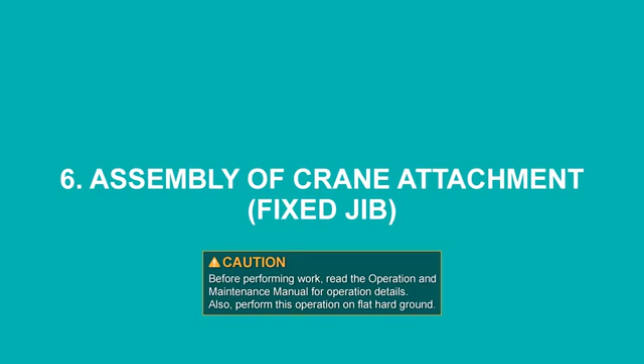Boom, jib and guy line arrangement. Prepare the boom and guy line according to the arrangement chart. Only the preferred boom arrangement is shown in the table. Please check the operation and maintenance manual for details. Do not assemble a boom which is not shown in the operation and maintenance manual.

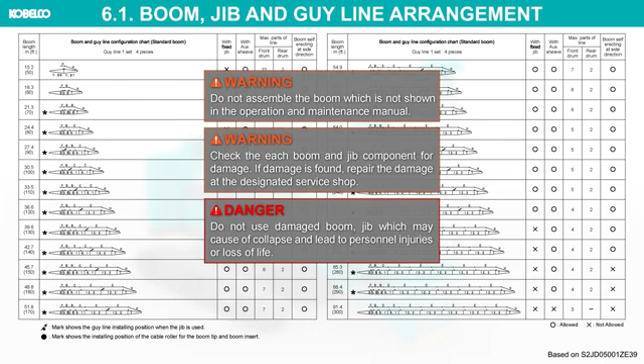Check each boom and jib component for damage. If damage is found, repair the damage at the designated service shop. Do not use a damaged boom or jib, which may cause a collapse and lead to personnel injuries or loss of life. The length of the boom to which the jib can be attached is 27.4 meters to 76.2 meters.

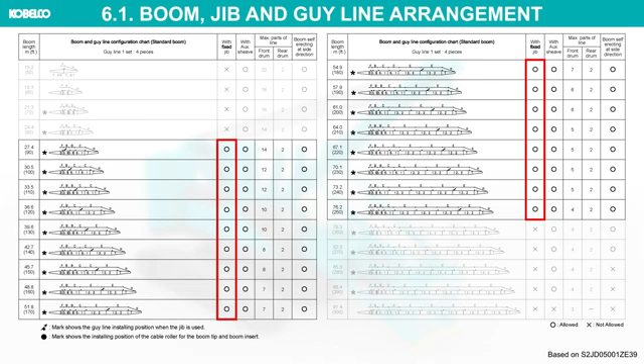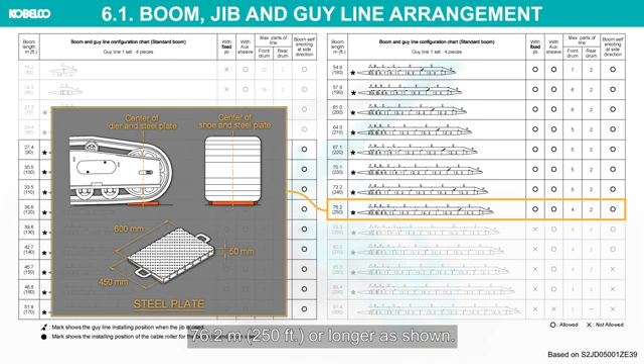As for the fixed jib specification, place the steel plates between the ends of the crawler and the ground when erecting or lowering a boom if the boom length is 76.2 meters or longer as shown. When placing the steel plate, the crane travels forward until the idler center comes to the center of the steel plate.

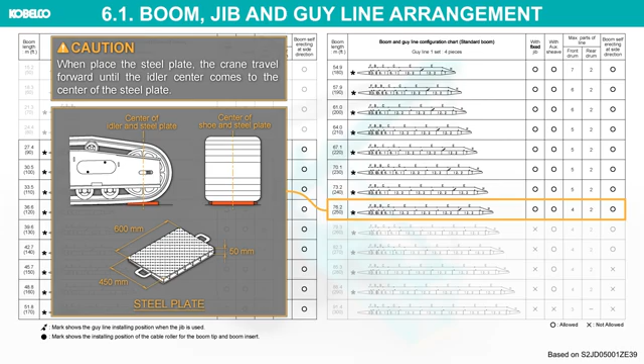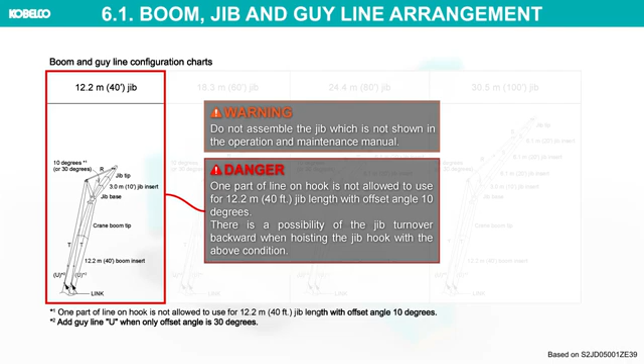Prepare the jib and guy line according to the arrangement chart. Do not assemble a jib which is not shown in the operation and maintenance manual. One part of line on hook is not allowed for 12.2 meters jib length with offset angle 10 degrees. There is a possibility of the jib turning over backward when hoisting the jib hook with the above condition.

This video describes the following attachment configurations. Boom: 30.5 meters, standard boom tip. Fixed jib: 12.2 meters, offset angle 30 degrees. Hook: 70-ton hook, 4 parts, plus ball hook, 1 part.

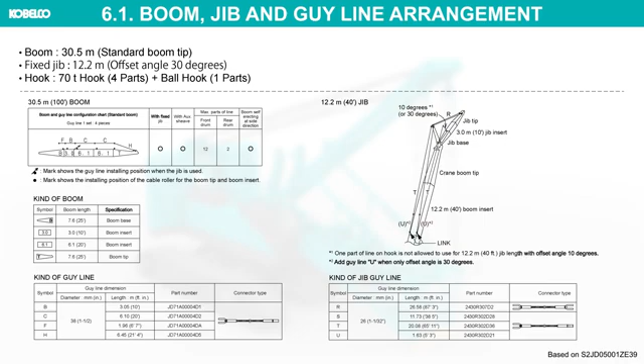Caution for cantilever. Ensure to work with the gantry set at work position, and the inching switch should be set in inching position. Do not exceed the cantilever limitation. Do not perform hoisting work or travel while the boom is supported with the cantilever.

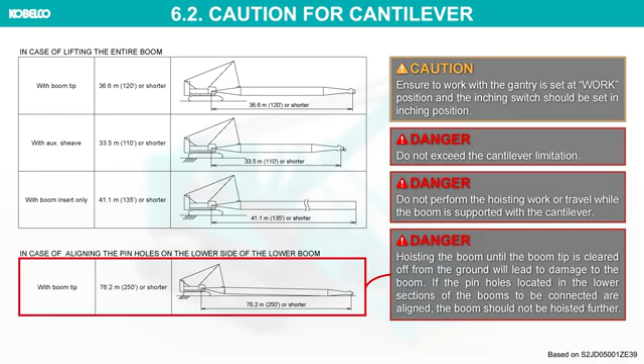Hoisting a boom until the boom tip is cleared off the ground will lead to damage to the boom. If the pinholes located in the lower sections of the boom are to be connected or aligned, the boom should not be hoisted further. Installing a boom. This assembly procedure starts with the machine under the following conditions.

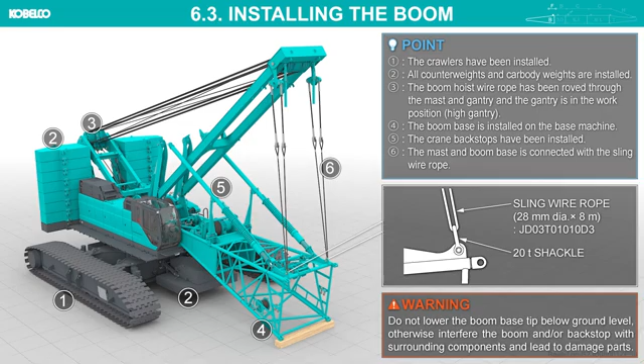Do not lower the boom base tip below ground level, otherwise the boom and/or backstop will interfere with surrounding components and lead to damaged parts. Prepare the required boom components, paying attention to the up-down face of the insert booms, and place them near the boom base section. Do not place the attachment directly on the ground. Place a wooden block and place the attachment stably on it.

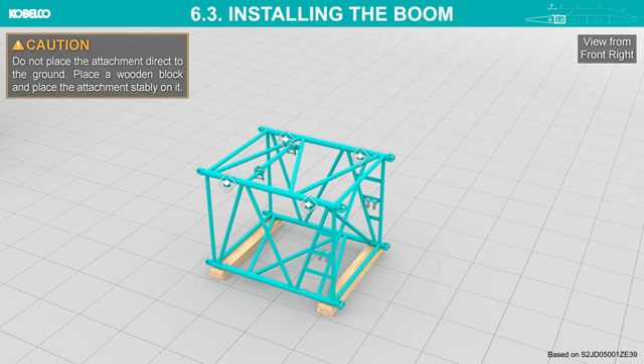Attach the sling to the boom insert. When lifting the boom or jib, use the protector or the synthetic fiber sling. Do not lift at the lattice pipe. In case of lifting a semi-assembled boom or jib, lift at a connecting part. The hanger bracket can be used only when the boom is a single part. Do not use it when plural booms are connected, otherwise the boom may be damaged.

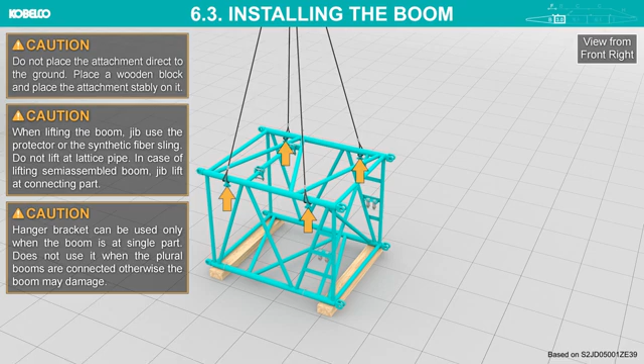Lift the boom insert and position it near the boom base. Do not stand on or enter under or inside the attachment being assembled or disassembled. Align the top side pinholes. Insert the connecting pins into the top side pinholes. Use flanged connecting pins. Be sure to tap the connecting pins from the outside to the inside. The inserted connecting pin should be oriented vertical to its pinhole; secure the spring lock pin.

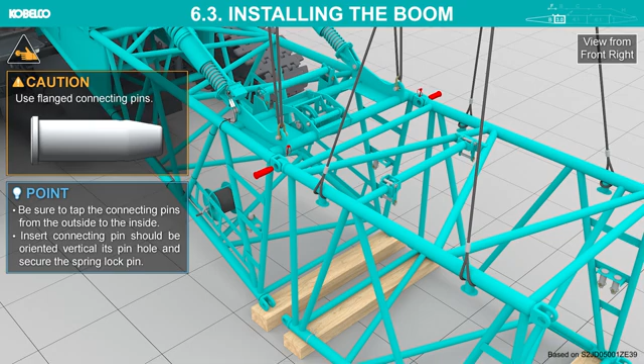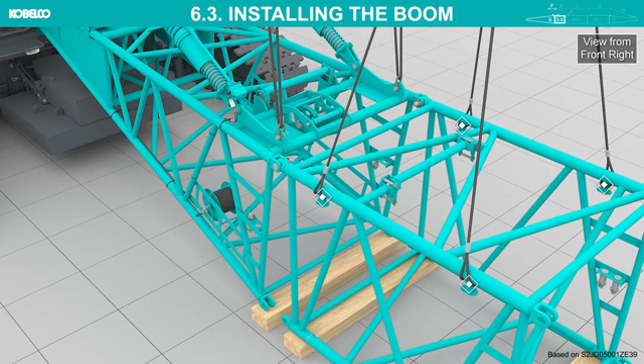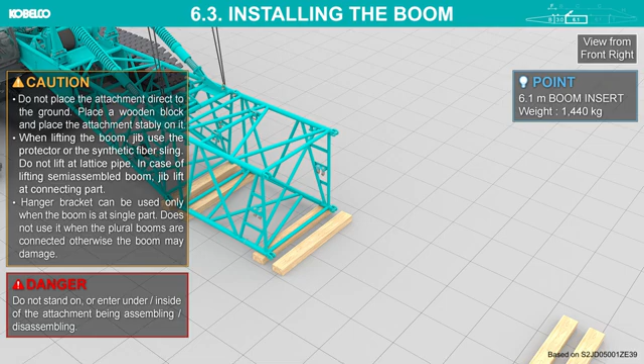Detach the slings. Connect the rest of the boom inserts according to the boom configuration chart. Install the jib guy line link to the boom insert.

Use the long pin, double tapered pin, for the jib guy line link as the connecting pin with the boom insert. The installation position of the jib guy line link depends on the boom configuration. Please refer to the operation and maintenance manual for details.

Attach the sling to the boom tip. Lift the boom tip and connect it to the boom insert.

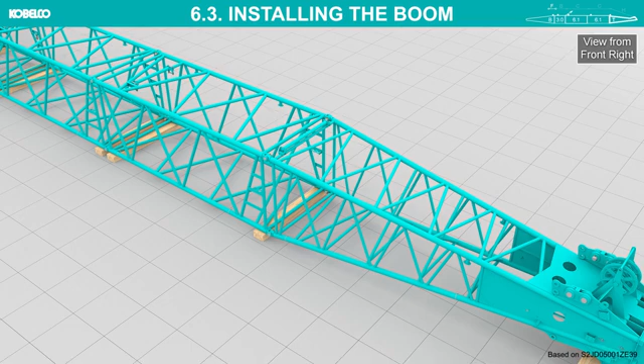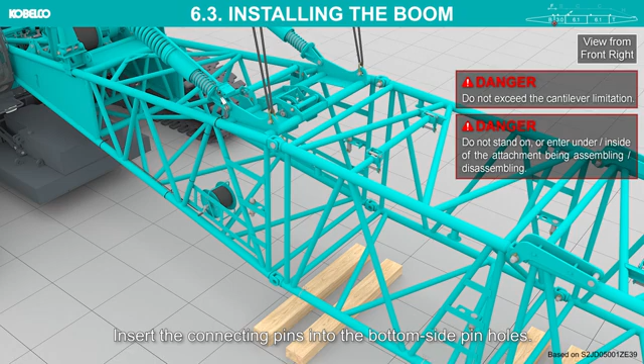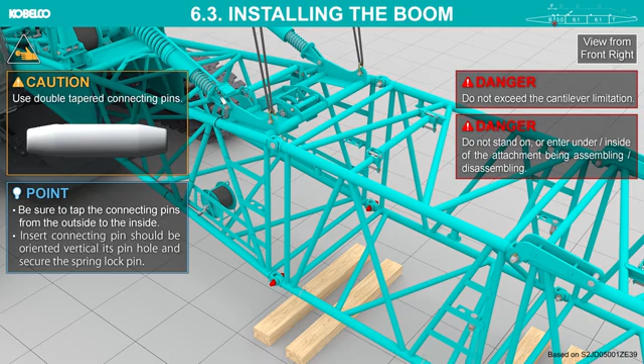Lift the boom base up by raising the mast so that the lower connecting holes of the boom base and boom insert align. Do not exceed the cantilever limitation. Insert the connecting pins into the bottom side pinholes. Use double tapered connecting pins. Lower the mast and remove the slings.

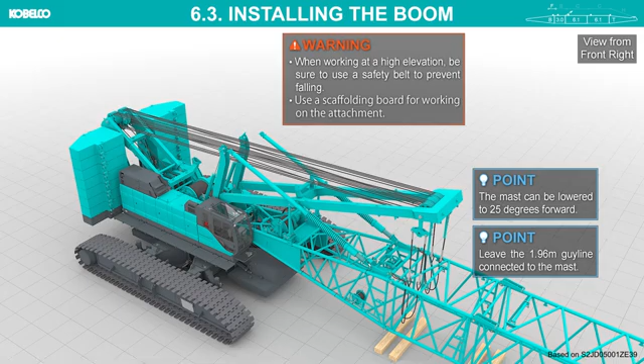When working at a high elevation, be sure to use a safety belt to prevent falling. Use a scaffolding board for working on the attachment. Install or extend the cable rollers.

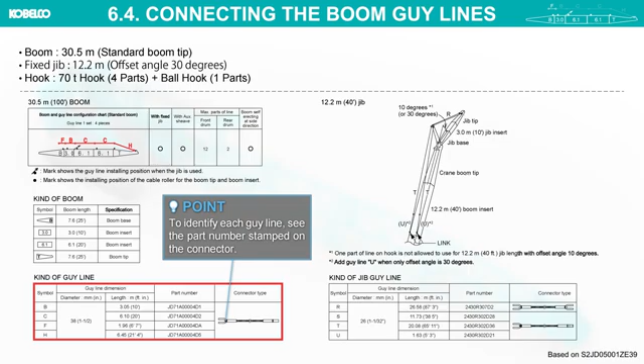Connecting the boom guy lines. Prepare the guy lines according to the arrangement chart. To identify each guy line, see the part number stamped on the connector. Lift the guy lines and connect them to the top end of the boom tip.

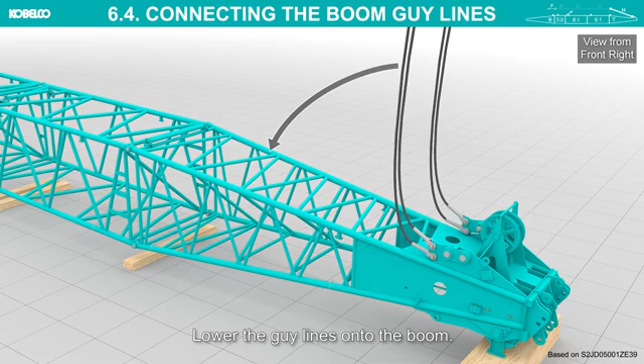Spread the split pins 60 degrees apart, 30 degrees to each side. Do not bend just one side 60 degrees. Lower the guy lines onto the boom. When working at a high elevation, be sure to use a safety belt to prevent falling. Guide the guy lines as necessary so that they do not droop to the side of the boom. Keep the guy lines as straight as possible on the boom.

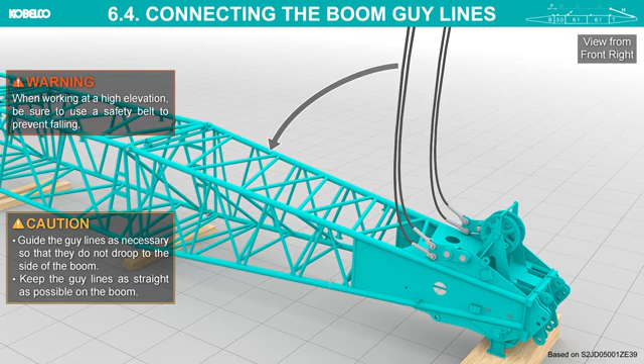Connect the rest of the guy lines according to the boom configuration chart. Insert the guy line connecting pin from the inside.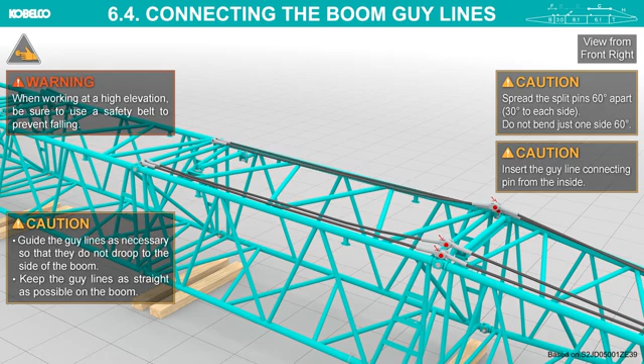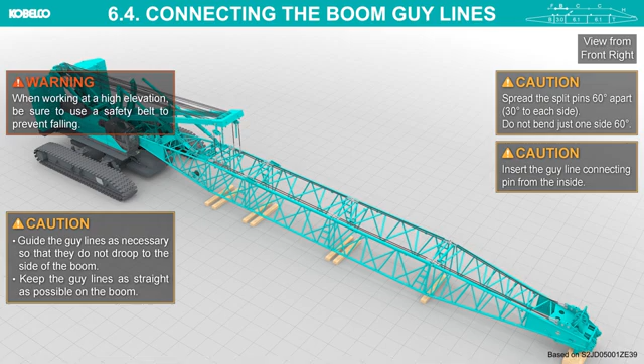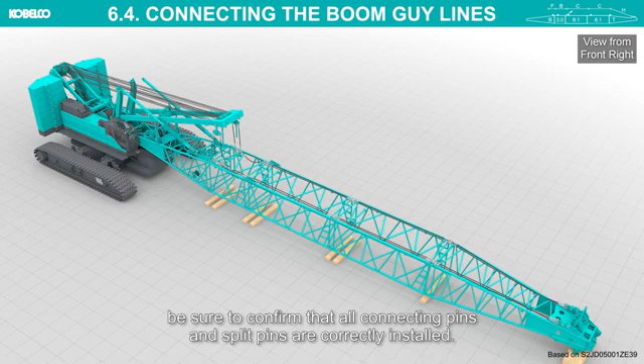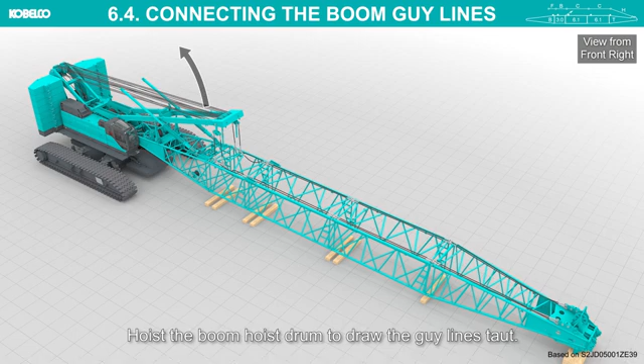Fully lower the mast assist arms. Hoist the boom hoist drum to draw the guy lines taut. Place a signalman to prevent accident from rotating drum. Stop hoisting the boom hoist wire rope just before the boom tip leaves the ground.

Front drum wire rope reeving. In this chapter, 70-ton hook with 4 parts of line wire rope will be assembled as explanation. Swing the upper machinery and set the hook block, weight of over hoist limit switch and socket on the ground. Set the hook block so that it is in a straight line with the point sheave.

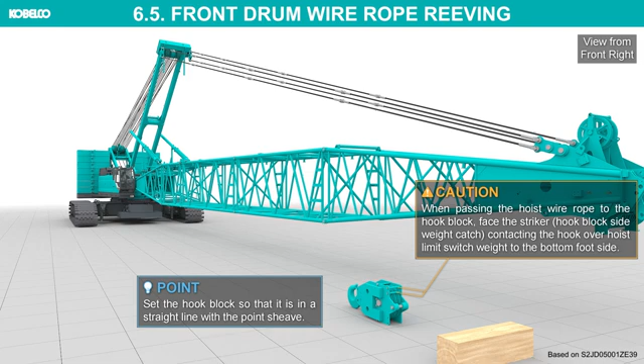When passing the hoist wire rope to the hook block, face the striker, hook block side weight catch, contacting the hook over hoist limit switch weight to the boom foot side. Swing the upper machinery back over the hook. Pay out the front drum wire rope.

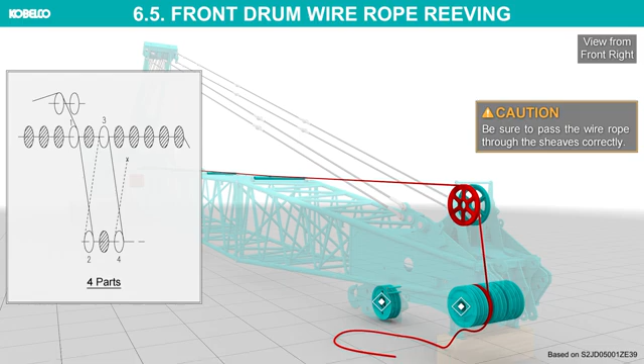Pass the wire rope through the idler sheave and boom point sheave. Be sure to pass the wire rope through the sheaves correctly. Pass the front drum wire rope through the hook sheave and boom point sheave in order. Install the limit switch and pass the wire rope through it.

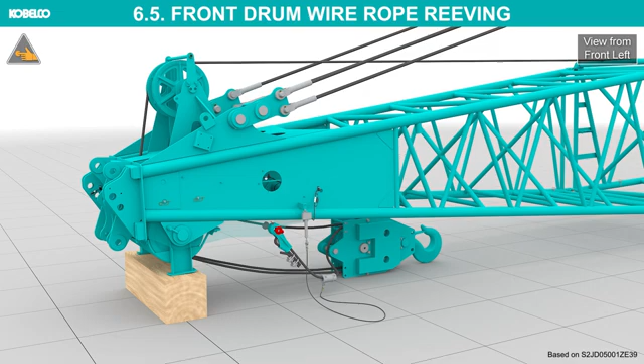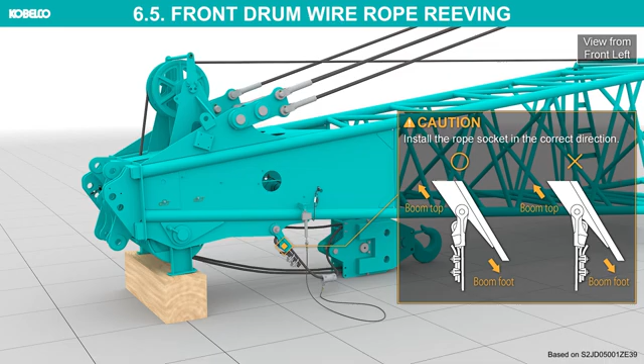Install the rope socket and secure the end of the wire rope to it. Install the rope socket in the correct direction. Disconnect the cables from the cable reel on the boom base. Pay out the electrical cable from the cable reel.

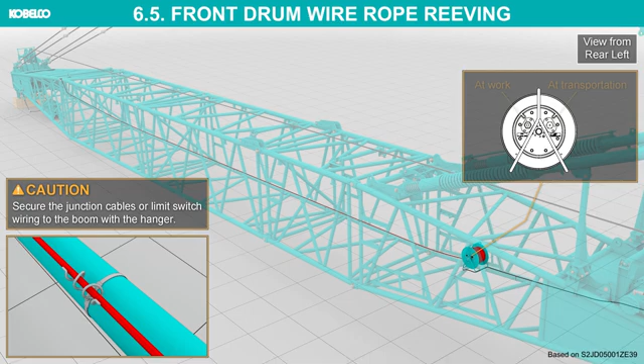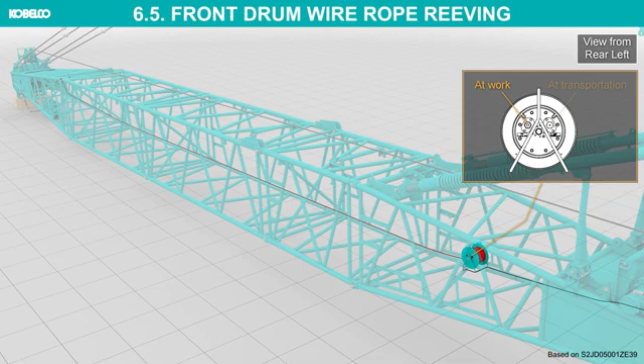Secure the junction cables or limit switch wiring to the boom with the hanger. Connect the cable to the boom tip junction panel. Engage the cable reel stopper once having paid out enough cable. Connect the cable to it. Work on cable reel. Check the connection of load detector connector.

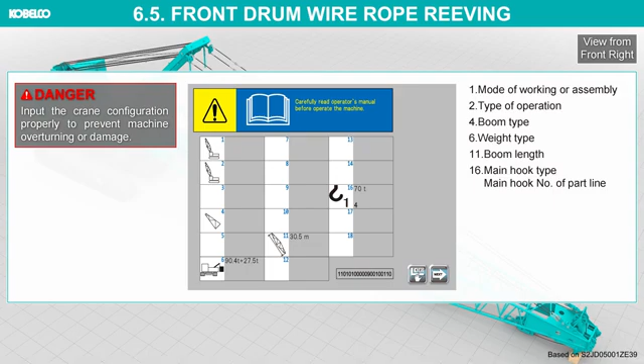Set the crane configuration into the controller. Input the crane configuration properly to prevent machine overturning or damage. Assembling a jib. Assemble jib and strut on the extension line of the boom tip.

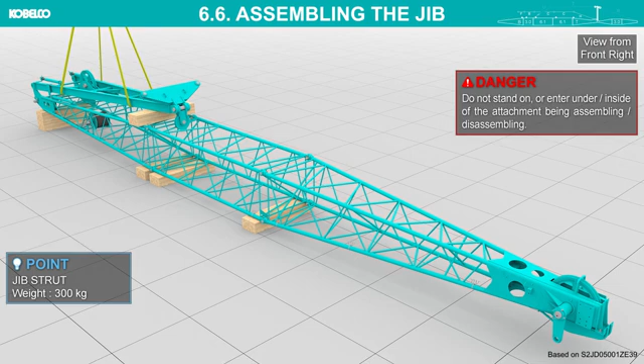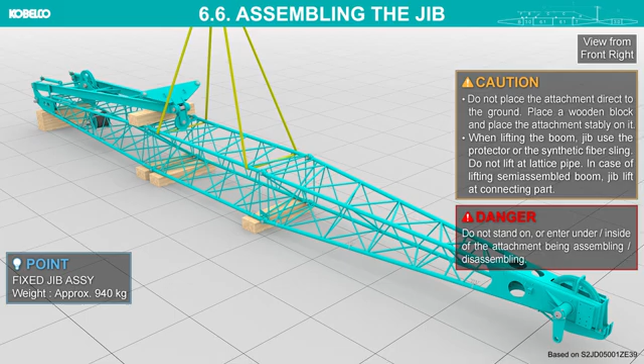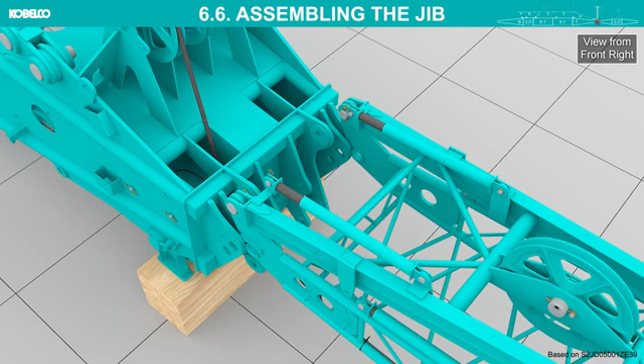Lift up the pre-assembled jib with an assist crane and move it toward the boom tip. Remove the jib foot pin. Align the pinholes and install the jib foot pins. Lower the jib tip onto the wooden block.

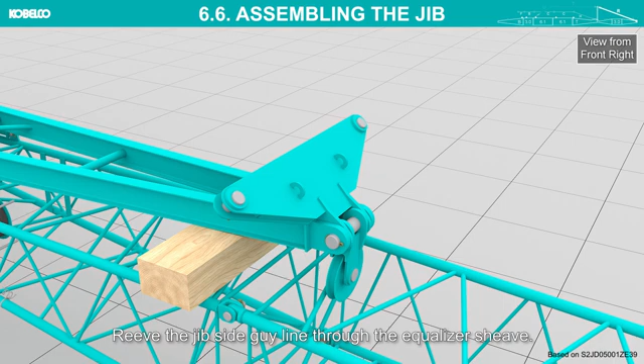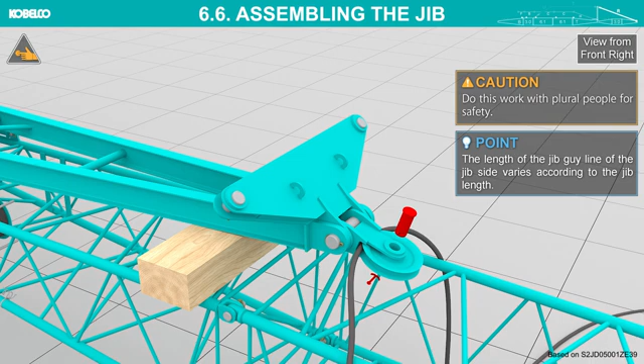Reeve the jib side guy line through the equalizer sheave. Do this work with plural people for safety. The length of the jib guy line of the jib side varies according to the jib length. Connect the boom side guy lines to the link on strut.

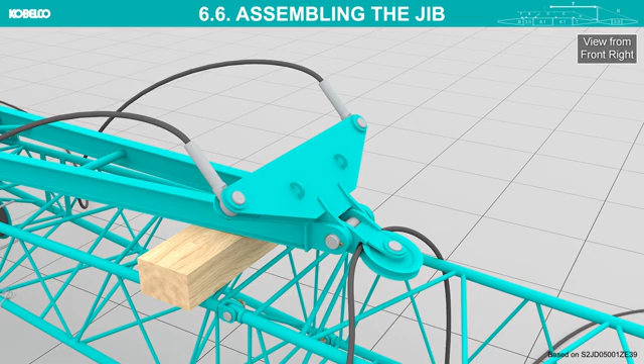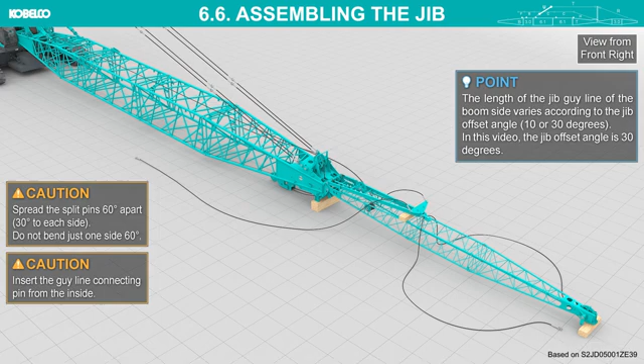Connect the guy line U to guy line T. The length of the jib guy line of the boom side varies according to the jib offset angle, 10 or 30 degrees. In this video, the jib offset angle is 30 degrees. Connect both ends of the jib guy line to the top end of the jib. Raise the strut with the assist crane and install the strut backstop and jib backstop.

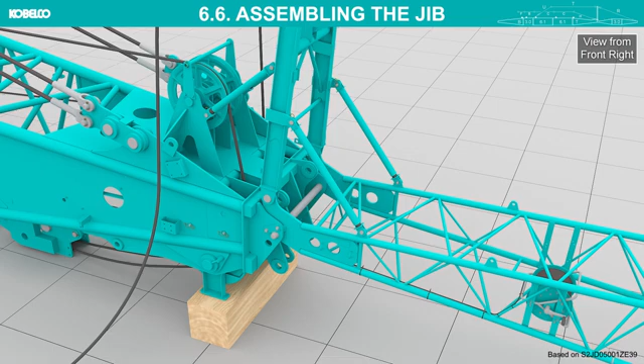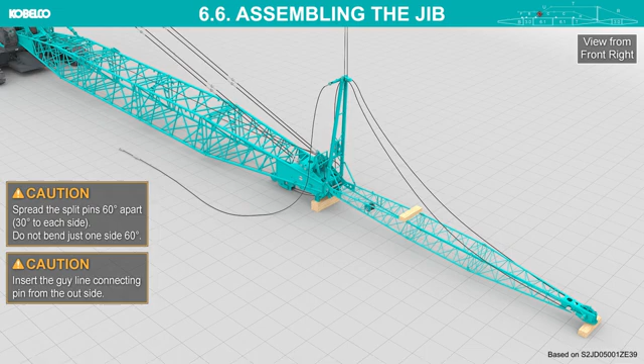Lift the jib strut and connect the jib guy line end on the boom side to the jib guy line link. After the assembly has been completed, be sure to confirm that all connecting pins and split pins are correctly installed.

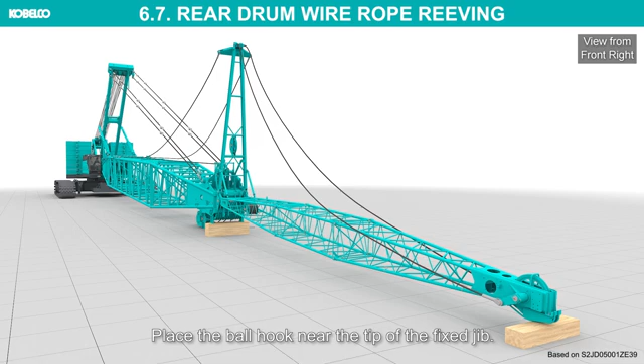Rear drum wire rope reeving. Place the ball hook near the tip of the fixed jib. Pay out the rear drum wire rope. Do not use hook with a part of line on the third drum. The boom may raise and turn over backward when hoisting the hook with a part of line.

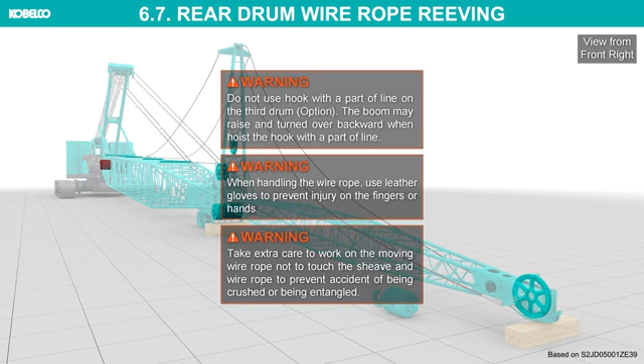When handling the wire rope, use leather gloves to prevent injury on the fingers or hands. Take extra care to work on the moving wire rope not to touch the sheave and wire rope to prevent accident of being crushed or being entangled. Pass the wire rope through the strut idler sheave and jib point sheave. Be sure to pass the wire rope through the sheaves correctly.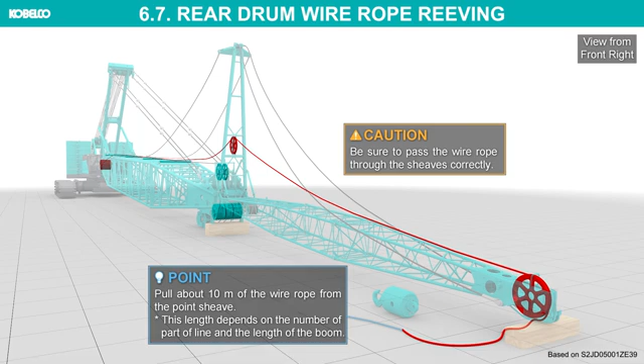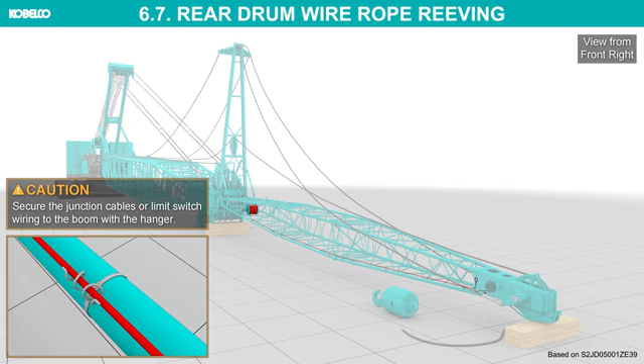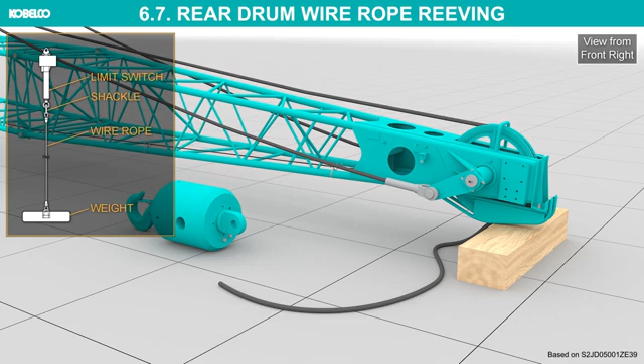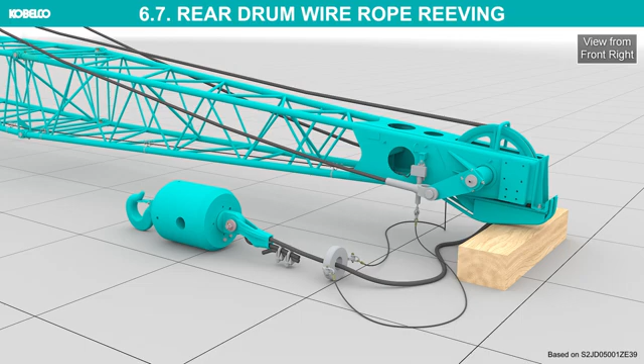Pay out the electrical cable from the cable reel. Secure the junction cables or limit switch wiring to the boom with the hanger. Install the limit switch and pass the wire rope through it. Install the rope socket and secure the end of the wire rope to it. Connect the cables of the jib base to the boom side cables.

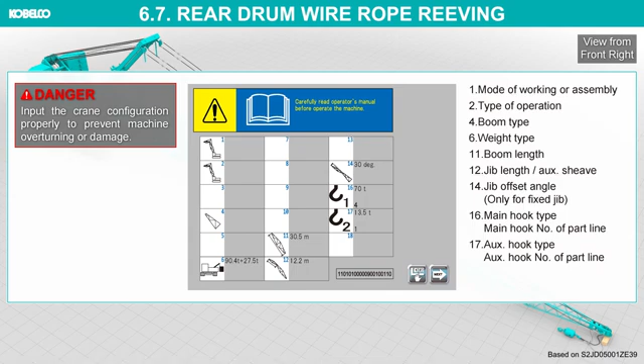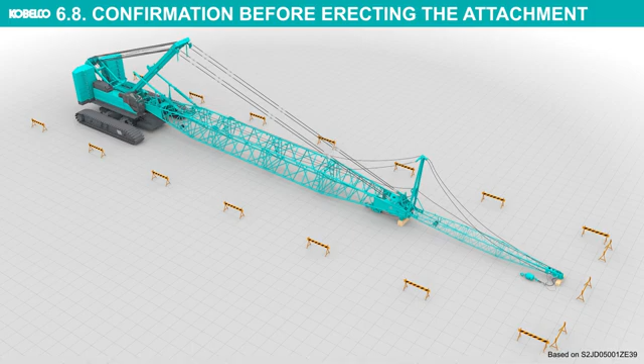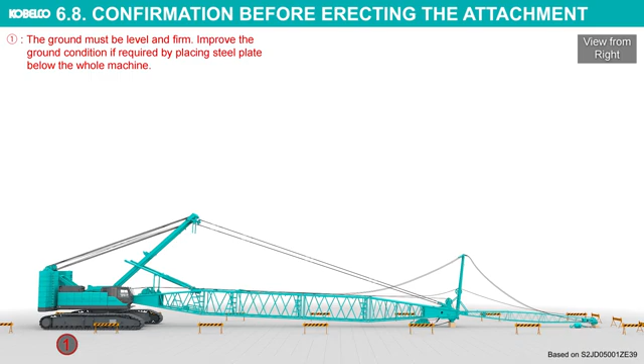Set the crane configuration into the controller. Input the crane configuration properly to prevent machine overturning or damage. Confirmation before erecting the attachment. Check the following items and confirm that there is no abnormality, then erect the boom. The ground must be level and firm. Improve the ground condition if required by placing steel plate below the whole machine.

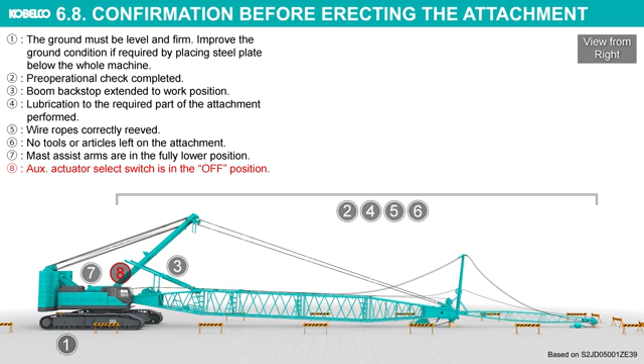Pre-operational check completed. Boom backstop extended to work position. Lubrication to the required part of the attachment performed. Wire ropes correctly reeved. No tools or articles left on the attachment. Mast assist arms are in the fully lowered position. Aux actuator select switch is in the off position. Off-limit signs posted at surrounding area of the attachment.

Wiring for the boom, main and auxiliary hook over hoist limit switches properly connected. Limit switches function. Load safety device correctly wired. Proper crane configuration data set, proper hook mode selected. Travel motor set to rear side. The steel plates are placed at the front end of the crawler, if it's required.

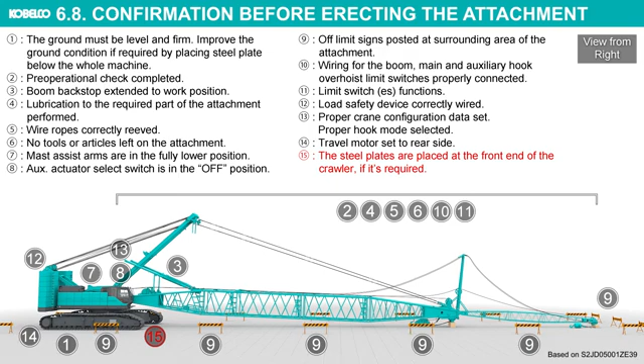As for fixed jib specification, when erecting or lowering a boom length of 76.2 meters or longer, place the steel plates between the ends of the crawler and the ground as shown. Travel the crane until the idler center comes to the center of the steel plate.